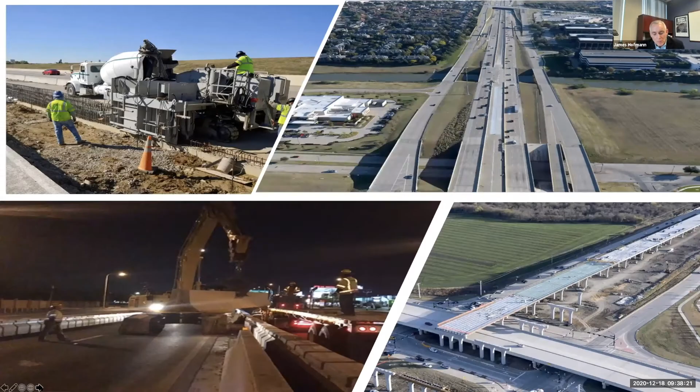So the global pandemic has negatively impacted all of us, and for NTTA, it's impacted our revenues. In April of this year, transactions were 57% below normal. They've leveled out the last few months to about 18 to 20% below normal. But we remain committed to bringing and advancing critical construction projects for the region, and you can see four of those here. So along the entire 26 miles of the Sam Rayburn, we're adding one lane in each direction.

We continue our 4th lane addition on the President George Bush Turnpike by adding that 4th lane in our last 2 sections, which spans from I-35 East to I-20.

In a much needed congestion mitigation and improvement project, we're expanding the Dallas North Tollway with the bridge over 380. And we just started construction of a 2-lane frontage road from FM 428 up to the Grayson County line.

So here in the next few years, you'll be able to take the Dallas Parkway and the Dallas North Tollway from Grayson County all the way down to downtown Dallas.

And last is a sign of our commitment to safety. We're replacing the median traffic barrier on the Dallas North Tollway from George Bush south to 635.

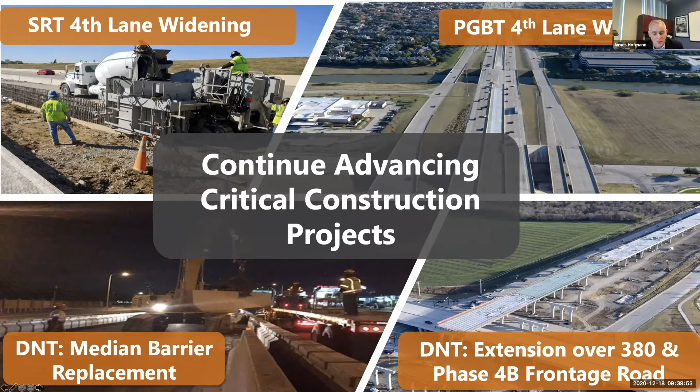These 4 projects represent an investment of over $400 million back into our region, and it's created thousands of jobs for our residents.

Finally, I'd like to talk a little bit about how to get engaged with NTTA. Those 4 projects, as well as others we're providing now and those in the pipeline, are possible because of our great vendor community here in North Texas. We need you to help us deliver the transportation options our region is asking of us.

We spend up to 300 million annually, and we want to do business with you. If you haven't already, we encourage you to register at nttamarketplace.org. There you'll be able to review and submit responses to NTTA opportunities, and also sign up for notifications for procurement opportunities that meet the specialties of your firm.

We're also very proud of our work in business diversity. Over the past several years, over 30% of our spending has been with diverse firms. Again, 30 cents out of every dollar NTTA has spent has been with a diverse firm, and we're very proud of that.

We have a number of outreach events which provide opportunities to meet and interact with NTTA staff, learn about upcoming procurements, and network with other firms. We also have robust capacity building programs internally with our ROAD program, which is relationship and opportunities advancing diversity, as well as our cooperative inclusion program with TxDOT.

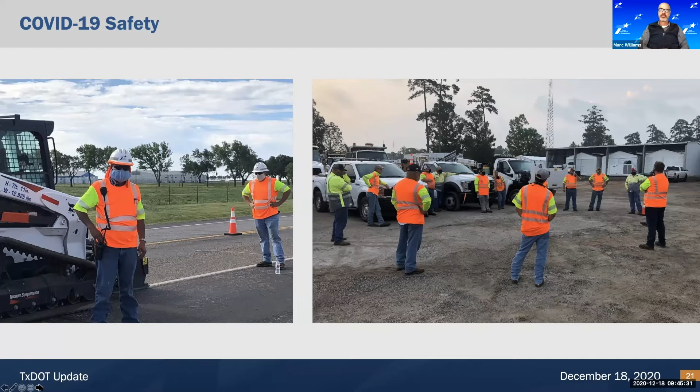So we are continuing to execute. You all, partners with us in the contracting community, are a big part of that, and thank you all very much for your commitment. So let's jump into the next couple of slides here and talk a little bit about some of our priorities and initiatives.

Clearly, TxDOT's top focus is always safety, and the commission stepped up about a year and a half ago with an additional $600 million in safety funding approved by the commission. To date, $163 million of that has been let, with the remaining funding scheduled as part of the lettings through the end of this fiscal year. It was a quick turnaround, directed to go toward new projects to be included in lettings as quickly as possible. Developing those projects and getting them ready, and being able to execute on all $600 million in really under 2 years, is a remarkable achievement.

But it's all going toward the goal of ending the streak of fatalities on our Texas roads, which has been a charge of ours. Sadly, we surpassed a 20-year milestone, 20 years of having a fatality on our roads every single day, which is just a sad and difficult challenge for us. But we're up to the challenge, and we're committed to driving down fatalities on our roadways, ending the streak, and achieving vision zero by year 2050, which is the charge from our commission.

Go to the next slide, please.

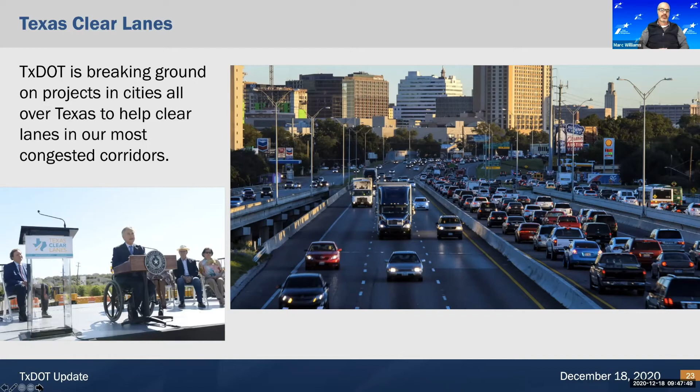Another important emphasis area continues to be our energy sector. The energy sector dipped a little bit this year during the pandemic, but the activity levels and the challenges that our motorists and operators in the energy sector face day in and day out, particularly from a safety standpoint, are critical, and this is an important sector for the Texas economy.

Through Proposition 1, which relies upon oil and gas severance taxes to help transfer those into the road fund, we received a transfer of $1 billion this year. Maintaining the productivity and competitiveness of our energy sector is really an important partnership for the state of Texas, and continuing to make these investments in that region of the state is a top priority as well for our commission. Next slide, please.

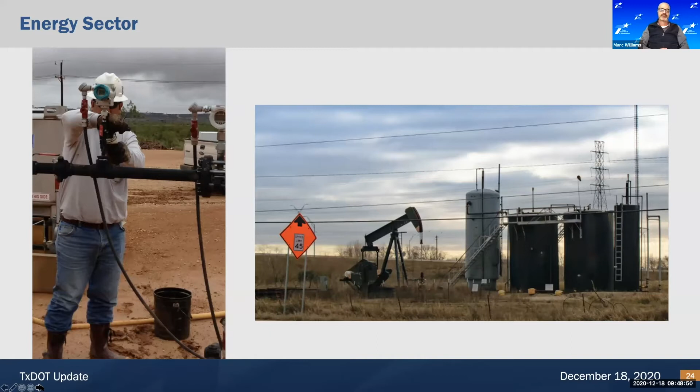So we'll talk a little bit here about contracting activities within the state of Texas. Our contract lettings continue to progress. As we talked about earlier, we're maintaining the momentum that we have in the state, and our current schedule of contract lettings really strives to maintain a balanced portfolio of lettings every month. We really shoot for a range of around $400 to $600 million a month.

At times, we've seen some dips in the last couple of months in the number of projects included in our statewide lettings, but we're expecting those to pick up over the coming months, and we expect through the end of this fiscal year there to be a pretty robust statewide letting program throughout Texas. We'll get into a few more details as we get into the next slide here.

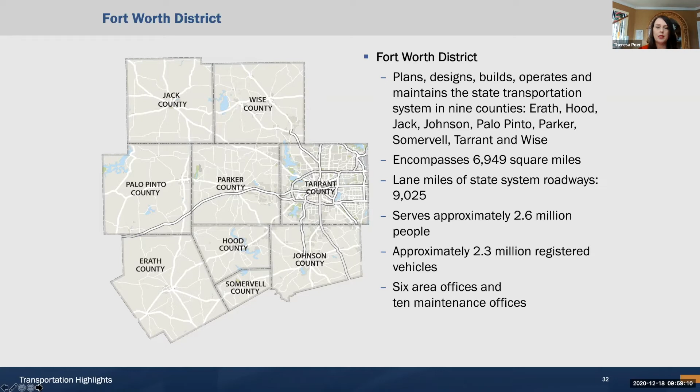Our Fort Worth district serves 9 counties in the area: Erath, Hood, Jack, Johnson, Palo Pinto, Parker, Somervell, Tarrant, and Wise County. Our total square miles are around 6,900, with a little bit over 9,000 miles of state system roadways. We serve approximately 2.6 million people, 2.3 million registered vehicles, and in our district we have 6 area offices and 10 maintenance offices.

On district statistics: this past year we had an estimated annual construction letting of around $400 million. Currently, we have $2.7 billion worth of active contracts going on, including $1.4 billion of traditional design bid build projects, and our 2 CDA projects still ongoing -- the 635 and 121 interchange, and the 35W 3C project. As of now, we have about a 51% completion rate of our total construction projects. Our average annual maintenance budget is $164 million in the district.

Now I want to change gears and talk about some different initiatives. Mr. Williams covered the Clear Lanes initiative in his presentation. In 2014 and 2015, Texas voters approved Prop 1 and Prop 7, which direct different funding streams back into the State Highway Fund. TxDOT has dedicated $6.8 billion through the Texas Clear Lanes initiative to help address congestion and gridlock in our Texas metro areas.

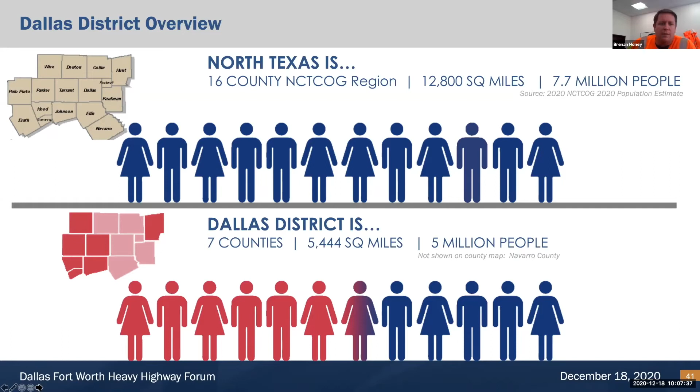Navigating through the pandemic, on March 13th TxDOT administration informed the district that office workers and non-essential employees must work from home starting March 16th. Credit to our district engineer, Mo Bur — sometime in February he started discussing plans in case the pandemic really did come. At the time I was a little reluctant to believe it because it happened so fast, but they had already implemented some plans and we were doing alternative work strategies, so we had a lot of equipment ready for our office personnel to go home. It was pretty seamless when the order came down on March 13th.

Then Sunday night, March 15th, Dallas County issued one of the first stay-at-home orders in the state, which caused a lot of confusion. We poured through the order to determine if it applied to TxDOT. We didn't think so because it was a county order and we're part of the state. We coordinated with TxDOT administration and the Attorney General's office for further clarification, and subsequently determined yes, we are essential. We're going to keep moving, keep working, making sure the highways are safe.

At the same time, we started thinking about additional protocols for construction and maintenance contracts. We had to figure out how to limit the number of employees in the field office, get hand washing stations, and work with the TxDOT-AGC Joint Task Force for additional safety protocols. But the main thing was we kept working. So on March 16th, our construction inspectors and maintenance workers showed up to work, and we started doing our daily safety briefs outside.

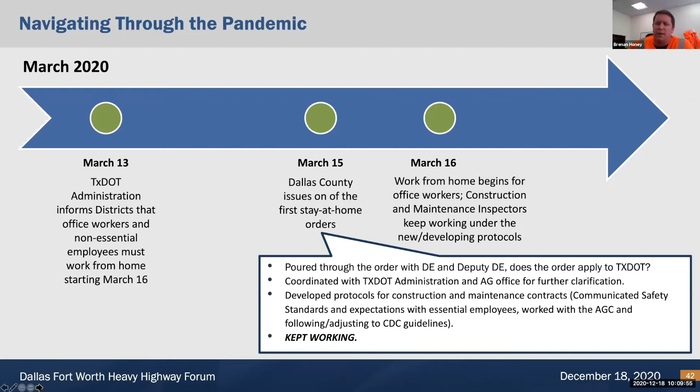As far as the office, TxDOT released a playbook for safely returning to in-office operations. It's a 3-phase approach for the return, and we're currently in phase 1B.

Phase 1B is up to 25% occupancy. It's totally voluntary, and our office is probably running a little below that 25%, but all meetings must be virtual as much as feasible. In the field, we'll often meet in the field, but in-person meetings are only allowed in an actual district office or TxDOT-owned property, and we have to have the chief engineer's approval. How long we'll be in phase 1B is unknown given the pandemic, but it seems to be working pretty well for our district. We've really kept moving, and I've been extremely proud of everybody I've been working with, from the administration down to the guys working every day on the maintenance crews.

All right, let's get to something a little more positive. I wanted to talk about some project highlights. I know through a lot of these conferences we've talked a lot about this ABC project, but we're real proud of how this went.

This was 635 northbound and southbound at Seagoville Road. SEMA Construction was our contractor, and we had a strong partnership with them. I was the area engineer when we were planning this, and then Amanda Moser took over when it was actually constructed.

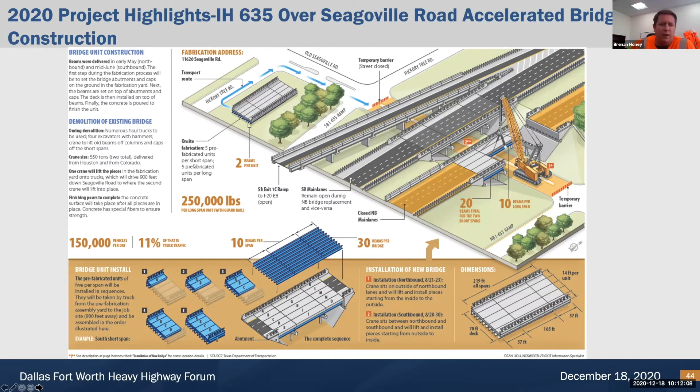You can see in these pictures they built the pieces offsite and brought them in on trucks. The larger pieces weighed about 250,000 pounds, and they essentially already had the bents and abutments retrofitted. Then all they had to do was take off the old deck and start putting in the pieces. Each span had 5 pieces, so each bridge had 15 total pieces.

The closures took 56 hours - that's what we gave them, from 9 p.m. Friday to 5 a.m. Monday morning. Northbound, the first time they did it, they finished 2 hours early, which was great. Then when they did southbound, they actually finished 6 hours early because they had a learning curve.

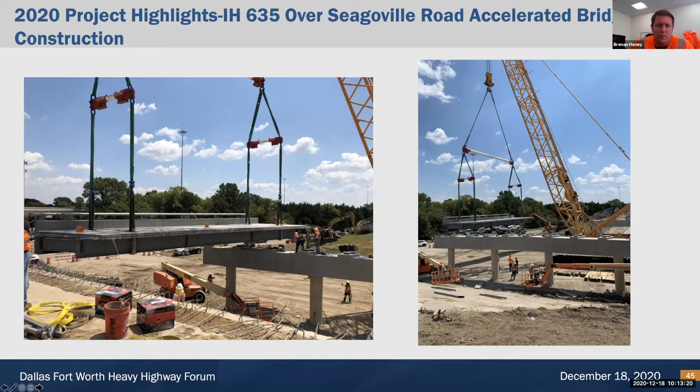Overall the contract was $9.2 million. That's not huge, but what it accomplished - replacing 2 bridges on an extremely busy interstate highway - we're really proud of it. This is our first ABC project, and we're going to look for other opportunities to do more jobs like this to minimize disruption to the traveling public.

You can see the yard with the steel beams, then they blocked it up, formed it, and poured it. Then they brought them in and set each of the panels in place. You can see they have loop bars that overlap each other from each piece on the right, and then they did HES, high early strength concrete, through those joints to lock all the pieces into place.

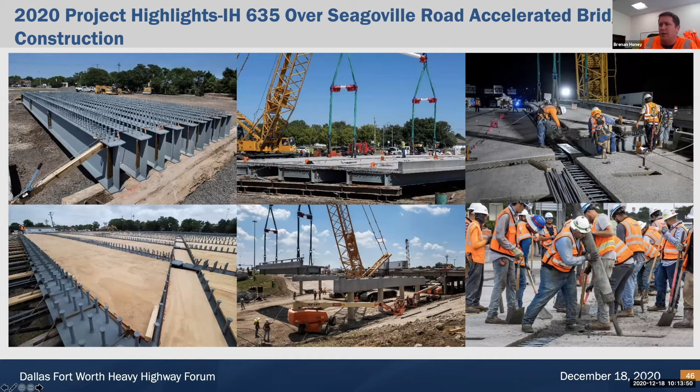And then if you go to the next slide - all right, this is the I-20, I-45 redecking. Gibson Associates was the contractor. It's about an $8 million contract.

You can see on the left how bad those existing direct connects were. A lot of these older steel span direct connects especially have a lot of issues on the surface. So they did ground penetrating radar and developed a plan - we would hydro demo the first 2 inches or so, down to the rebar on the concrete spans, and on the steel spans we'd do a full deck replacement.

Each DC was set with strong incentives and disincentives, ranging from $10,000 a day to $40,000 a day. I do want to point out Gibson met every milestone or was early. That's from exceptional planning on their part, getting as much done as they need before they actually close the direct connect, and then when it closes, they go in and do it.

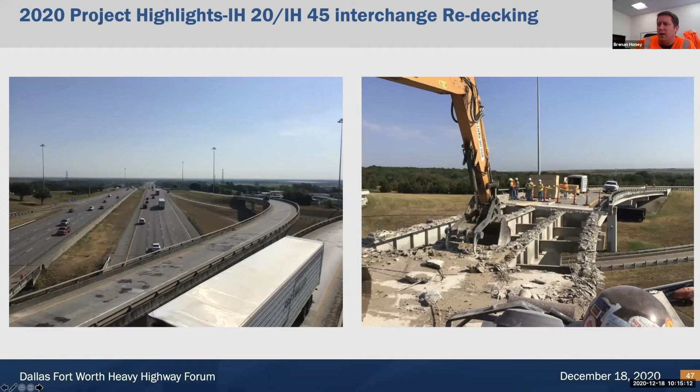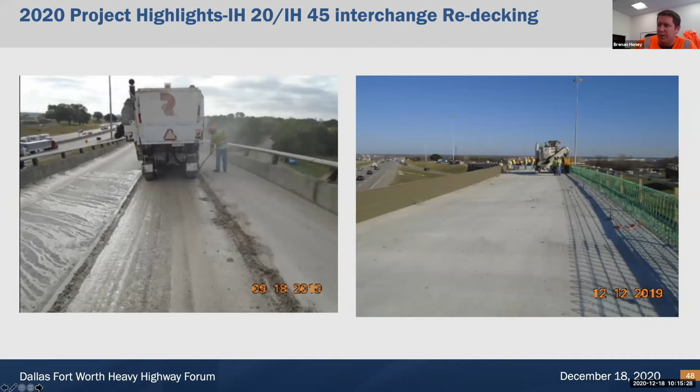Overall this job won the TxDOT 2020 Journey to Excellence Award Gold. I can't emphasize what a huge improvement it was. On the left is the hydro demo, and on the right you can see what the new deck looks like right at the end. They still had to pour the rail on the right, but it's just a 1,000% improvement. It's quite amazing.

All right, let's take a quick look at our construction that we got going on - this is kind of a high level view. We currently have 125 active design bid build contracts under construction with a contract value of about 2.2 billion, and approximately 1 billion outstanding left to go. We currently have 2 design build projects under construction with a total contract value of 2.4 billion, with approximately 2 billion outstanding.

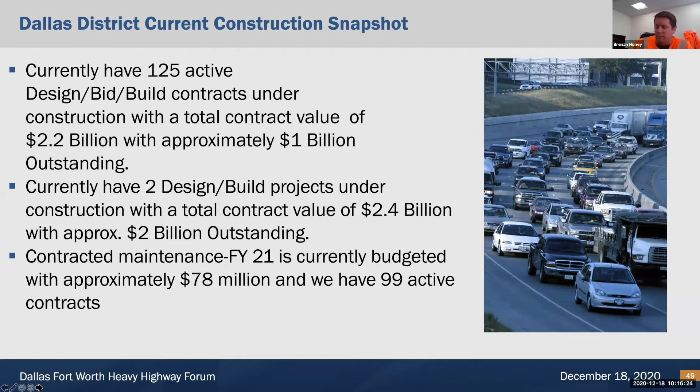I also want to point out our contracted maintenance for fiscal year 21 is currently budgeted at approximately 78 million, encompassing about 99 active contracts, and those are rolling contracts. So there's always opportunities every month, and that's fiscally constrained, but we're always looking to get extra money. Hopefully by the end of the FY we're in the $82 million contracted maintenance range.

All right, this was just a brief overview of those other numbers by area office. So Amanda Moser, she's the Dallas area engineer. She's got about 687 million under construction right now.

Brandy Bush, our signal construction is at 28.8 million. Brenan Honey, which is me, that's the diamond interchange. We're running it out of the construction office. That's sitting at 326 million, with all the force accounts, et cetera. And then David Morin, that's our seal coat, at 14 million.

Jennifer Vorster with Collin County is at 261 million. And John Husbeth, that's the other seal coat, that's at 13 million. That's this year's; the other one was from the year before. And then Juan Paredes in Ellis and Navarro is sitting at 521 million.

And then Lane Selman, area engineer in Kaufman Rockwall, he's got 187 million right now, and that's about to change dramatically in the upcoming months, and we'll get into that in the breakout session. And then Tina Massey, as well, in Denton County, has 174 million. So like I said, we'll get into some more details in the next session on some of these upcoming jobs and the ongoing jobs, because Dallas is going to stay busy.

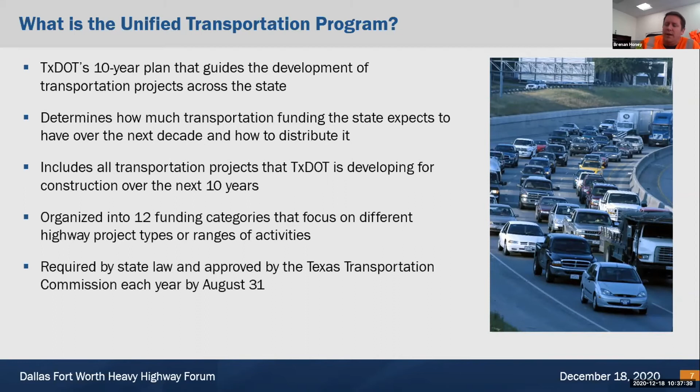It's organized into 12 funding categories that focus on different highway project types or range of activities. So you always hear people saying Cat 6, Cat 1, Cat 8 - those are the UTP funding programs, funding categories. It's required by state law and approved by the Texas Transportation Commission each year by August 31st, and it may be updated more frequently if necessary to authorize major changes to one or more funding allocations or project listings.

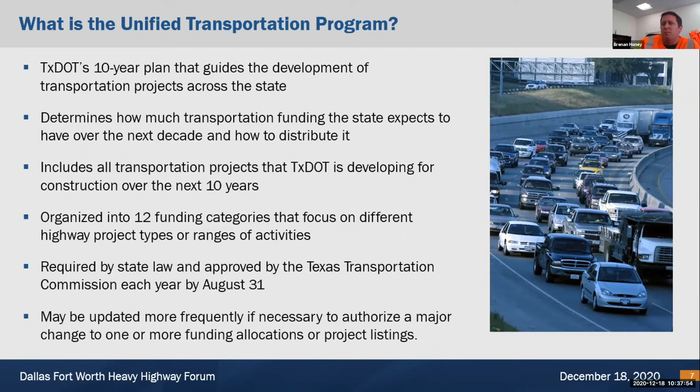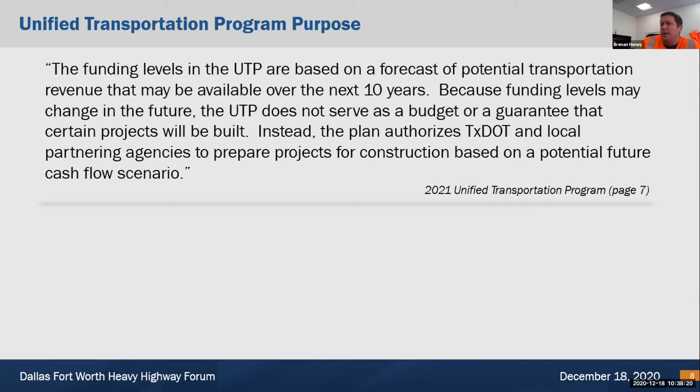The funding levels in the UTP are based on a forecast of potential transportation revenue that may be available over the next 10 years. Because funding levels may change in the future, which we expect them to, the UTP does not serve as a budget or a guarantee that certain projects will be built. Instead, the plan authorizes TxDOT and local partnering agencies to prepare projects for construction based on a potential future cash flow scenario.

Teresita from our programming office put this slide together for Mo, and I find it pretty fascinating. It's a continuous cycle. We're in FY 2021 right now, and we're coming up on the 87th legislative session in January. You can see the activities that are going to be going on as they develop, and then we get our General Appropriations Act most likely in June, which sets the TxDOT budget. Then they start doing statewide public involvement, and that will set essentially the 2022 UTP cycle - it will update from the 2021 cycle.

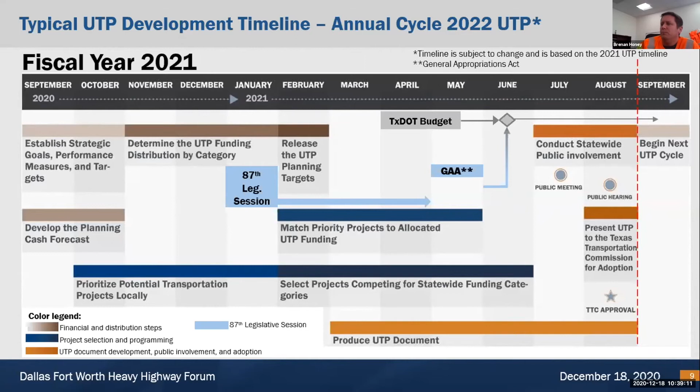All right, so this is the 2021 UTP distribution strategy. This is the statewide, and you can see there's 12 funding categories with how much is allocated for each one, and that's for the 10-year forecast. The total UTP was around 74.6 billion.

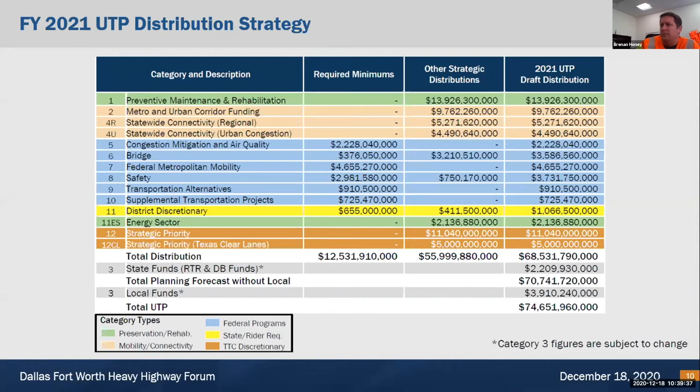You got the clear lanes, you got everything else. You got the safety, which we're not exactly sure, we go after every penny we can. We try to couple that with our Cat 1 as well to try to get these 3-foot shoulders. We still have a lot of rural areas and we're still trying to get away from these 22-foot roads and get them out to 28, 30 feet. We try to utilize safety money to get that.

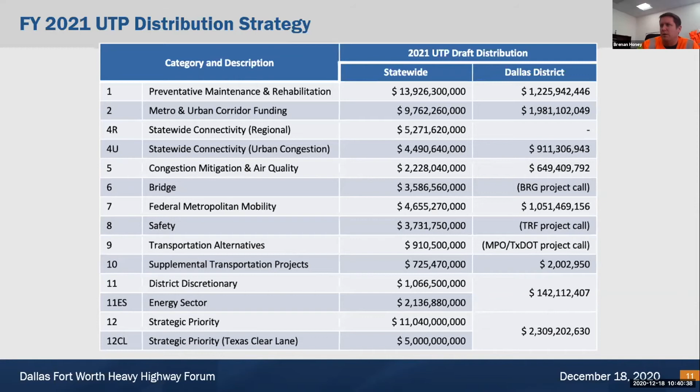So we're always looking for not just intersection safety, which we do. We run all kinds of numbers trying to generate scores from what's happening in the field to get that safety funding and couple it with some of our Cat 1. You can see you kind of divide that out by 10 and that gives you what you think we're going to have on average per year. So if you go to the next slide, please.

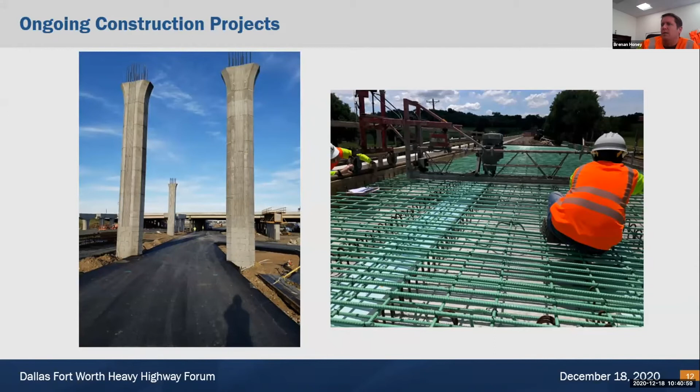All right, let's talk about some of the ongoing construction projects on 35E Lower Stemmons. It's $71.5 million, it's Balfour Beatty. We're hoping to finish it up this summer. It's operational improvements consisting of collector distributor roads to eliminate high volume weaving. No new right of way was required for this job.

We've still got to finish the northbound and southbound collector distributor bridges. And we got to finish up and mill and inlay the 35 main lanes. All right, next slide, please.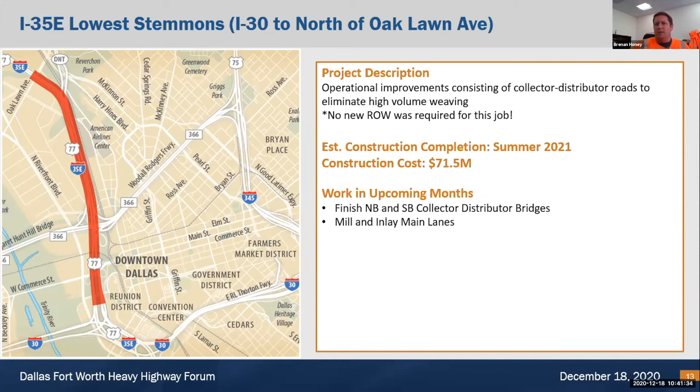I know over the years a lot of people have probably seen the simulations on what, we only leveraged 70-something million dollars, but the amount of operational improvement that we're going to receive out of that job is phenomenal. That's a testament to our engineers and our consultant engineers that analyzed this and figured out a way to do this.

You can see we're going to see a 178% increase Oak Lawn to Woodall, and 54% increase from southbound I-35E, and then Woodall to Oak Lawn, 285% increase, and northbound 35E, 33% increase. All right, next slide, please.

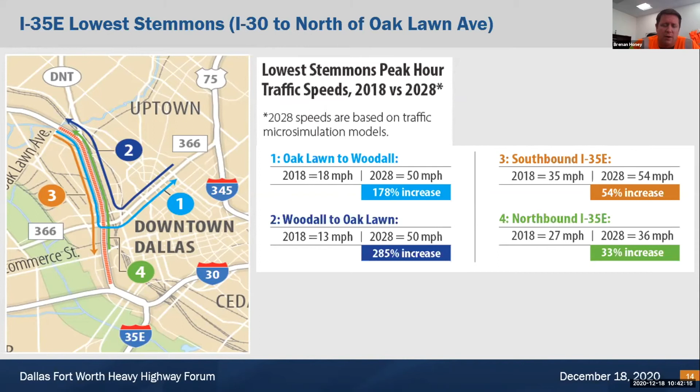All right, so this is the Southern Gateway, the design build. Right now it's reconstruct from 8 to 10 lanes and add a non-toll reversible main lane. Estimated completion is going to be the summer of 2022, and the construction cost is $625.6 million.

Current work and upcoming work is concrete paving, retaining wall, bridge work continues along 35E, including work on cross-street bridges for Ewing, Marsalis, and Illinois. Bridge widening and concrete pavement work on US 67, and traffic switches completed recently, and upcoming traffic switches will continue to open new lanes and ramps within the project limits.

And if I'm not mistaken, I think we're about 2/3 on the money. I think we're a little over $400 million spent. So there's, you know, 230 million left to go. Next slide, please.

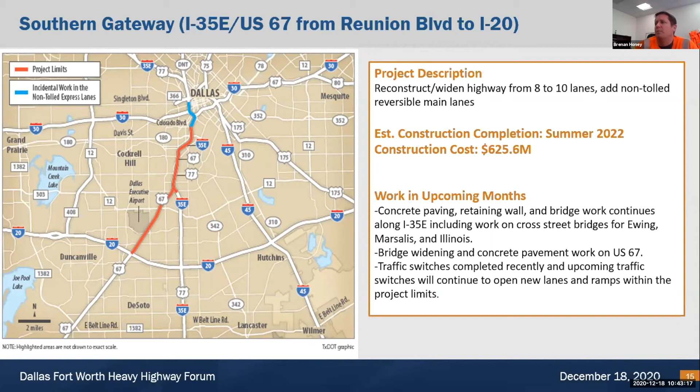All right, so here's our biggest design build. It's just getting really ramped up. This is 635 LBJ East. It's taken a long time to get to this point, and we're really excited in the district to see it going. I get to drive it every day coming through the interchange at 30 and 635, and it's pretty cool to see it going up.

It's widened highway from 8 to 10 lanes, add continuous frontage roads, reconstruct grandfathered toll managed lanes. Hoping to complete it in 2024, and it's approximately $1.6 billion.

Upcoming work is continue to relocate utilities through the corridor, excavation, drainage, bridge substructure in various locations. Continued progress on Galloway Bridge over IH-30 and temporary Skillman Bridge over 635, and then also the IH-30 interchange. Temporary traffic switches along the main lanes, frontage roads, and cross streets. Next slide, please.

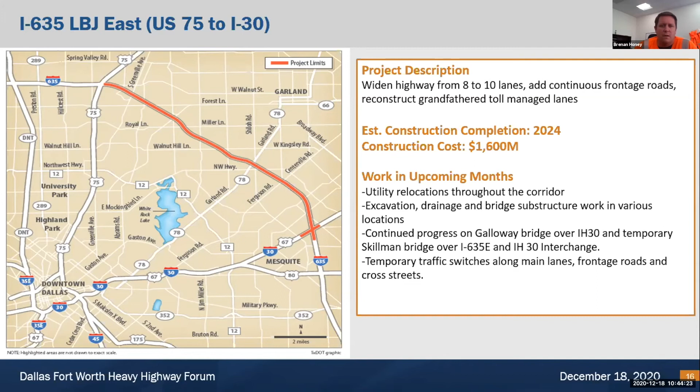So there you go. The Irving interchange, this is phase 2 of the Diamond.

It let last May, and we're just really ramping up on it. This job's being run out of my office as well because the Dallas area office is so busy at the time. It's reconstructing the interchanges at 183, 114, Loop 12, and 482. It's $301 million, and the work going on is essentially structure work, drill shafts everywhere. They're really getting access to a lot of places, getting after it, especially right there in the box interchange at 183 and Loop 12, and along 482 at 114. They're also doing a lot of ITS work, and the City of Irving water and sanitary sewer work is going on as well.

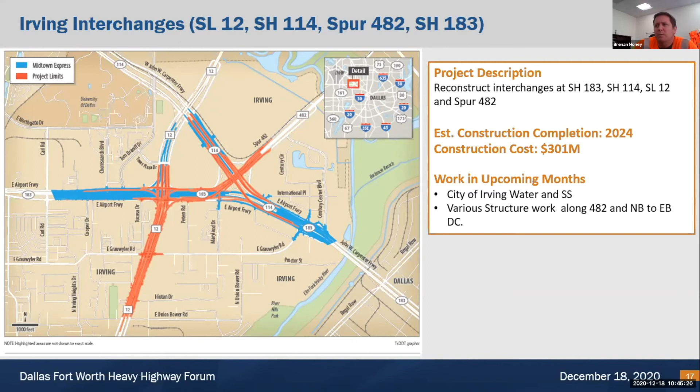All right, next slide. This is upcoming projects, for the remaining FY21. We've got about $439 million left to go this year.

I want to point out the next big one is obviously going to be the IH-30, and I'll get into a little more detail on that one. It's sitting at about 157, 158 million.

And then there's this smaller one, reconfigure intersection with sidewalk improvements at SH-78. That's the 3G project. That was kind of a polarizing project, very political. It's been very tough, a very tight area with tons of traffic. We're reconfiguring the intersection, so even though it's only 5 million, we always like to point that out. It's going to be a tough job, and when it's done, it's going to be really nice. It's a great opportunity, but not going to be an easy job.

Pointing out a few of the other jobs, we've got the US 380 second job that will go, and I'll get into more detail on that one. It's sitting at about 140 million. There are some other various ones there we can talk about, but let's go to the next slide.

For FY22, some of the highlights: we're expecting about $498 million right now. Depending on the timing, that might also include the procurement of the 35E. We're hoping to have that procured this summer.

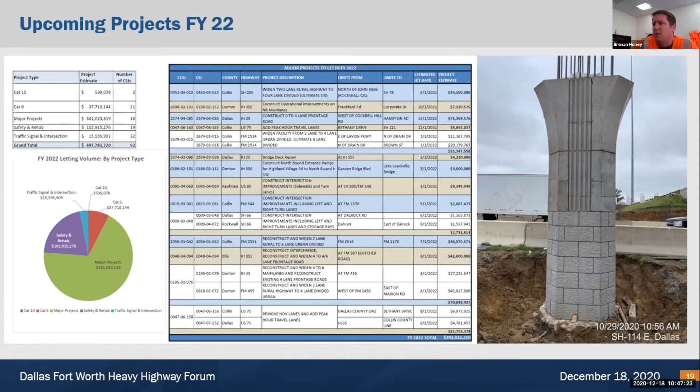If you go to the next slide, let's take a quick look at the I-30 projects. The construction costs are divided into 3 projects. The first one, in green, is going to let in March of 2021, sitting at about $158 million on the estimate.

It's going to get frontage roads across the first part of the lake from Dalrock to Bass Pro. Then the next section, from Dalrock to 205, we're hoping to let in FY23. That one's sitting at $243 million.

And then the last one, from 205 to the Hunt County line, again in FY23, hopefully early in 23, which would probably be September, October of 2022. It widens 4 to 6 lanes, at $289 million. The goal, if you've ever driven that, it's extremely congested with no alternate route. We've got to get these frontage roads punched through across the lake and then get more capacity through Rockwall County.

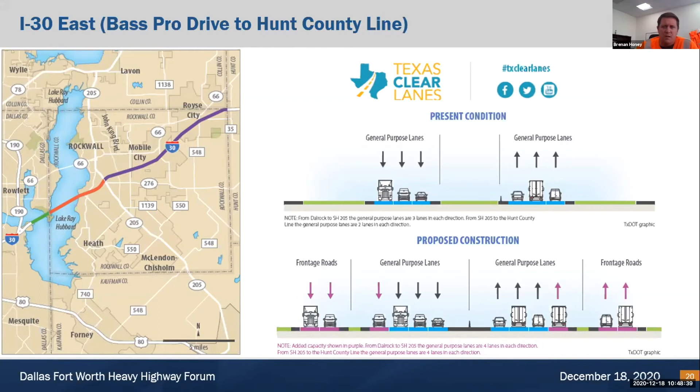Next slide, please. I briefly touched on this a couple minutes ago: US 380 in Denton County. It lets in May 2021, and it's approximately $140 million, from Loop 288 to the west.

The one that's going to let from 377 to west of County Road 26 is going to widen from 4 to 6 lanes, divided urban, with grade separation. I built that job in Collin County -- it's kind of a super arterial section, not quite a freeway, but it also has some controlled access elements, and essentially it's going to tie onto that piece. Mario Sinacola built that in 2017, 2018.

So that's that piece. And then the piece you see in red is already let -- I believe Regal Construction got that one, and it was about $21 million.

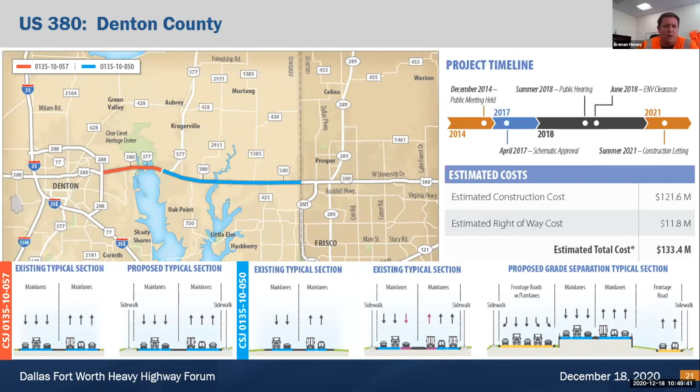All right, next slide, 35E phase 2. We're literally having one-on-ones right now for this job, in the middle of procurement. The construction cost estimates are between 650 to 709 million.

It fully reconstructs and widens I-35E from 635 in Dallas County to the Denton County line. General purpose lanes will be widened from 6 to 8 lanes, and it will include construction of continuous frontage roads and numerous intersection improvements. Procurement, like I said, is ongoing.

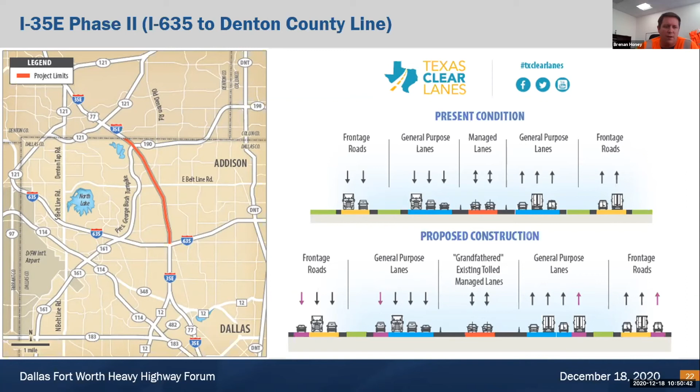The draft RFP was released and shortlisted proposers in August. TxDOT released the final RFP in October, and we're currently working through the ATCs. We expect to have it under construction this summer with an estimated completion date in 2025. Like another speaker said, find out who's shortlisted on that and be in touch with them. There is a lot of opportunity on that job as well.

Now here's the 35 Denton County. I think it shows on here 10 different jobs. There's actually another job that's going to let before that, about a $14 million job. But based on the funding, we're seeing what's happening. The total construction cost of this whole corridor is about $1.3 billion, with intersection and road improvements intended to address traffic bottlenecks caused by rapid population and industry growth along the 35E and 35 corridors in Denton.

Estimated completion, if we can get it all funded, which is still not entirely certain for the whole corridor, would be somewhere around 2028. But I do want to point out a few of the projects we're pretty confident we're going with. Project 8 at FM 455 has an estimated let date of 8/22. It includes widening of 455, primarily with a structure at 35E, I think it's an underpass, at a cost of $70 million.

Project 9 is partially funded, totaling over $400 million. That's the big red line on there. It's most likely going to be broken into smaller pieces to try to utilize the funding we do have, and we expect some of that to start in FY23.

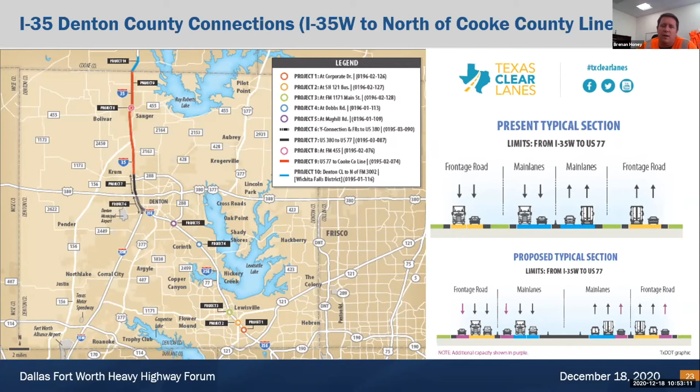So that's a snapshot of some of the construction. Of course, we've got dozens to hundreds of other jobs and projects in the works, and we're going to continue trying to get those ready, so when funding becomes available, if there's some kind of stimulus package or whatever comes along, we can get those funded, work with COG, and get those out the door. So that's all I've got for now. If you have any questions, feel free to contact the Dallas district or me anytime.

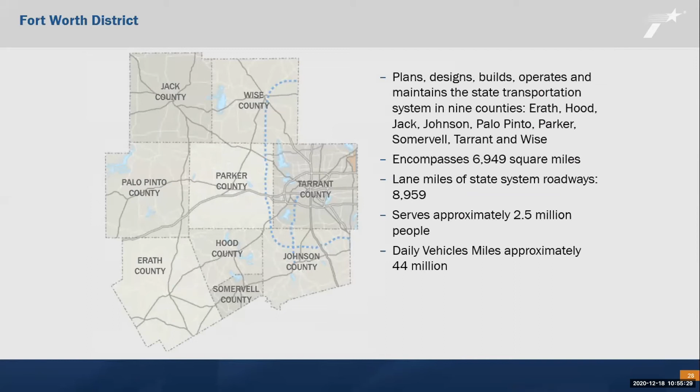So just thought I'd cover a few contracts, projects that are under construction but still have some significant work left, where there may be some opportunities.

Our 30/360 interchange near Six Flags is still ongoing. We estimate about another 2 years worth of work on that interchange. We did drop some bridges across I-30 that really opened up some space, so we ought to see some real rapid progress continuing on that project.

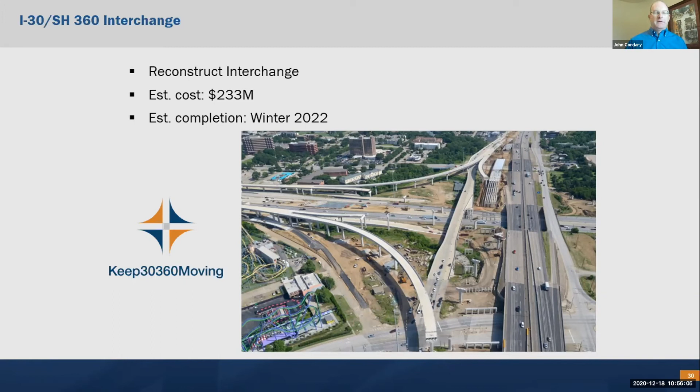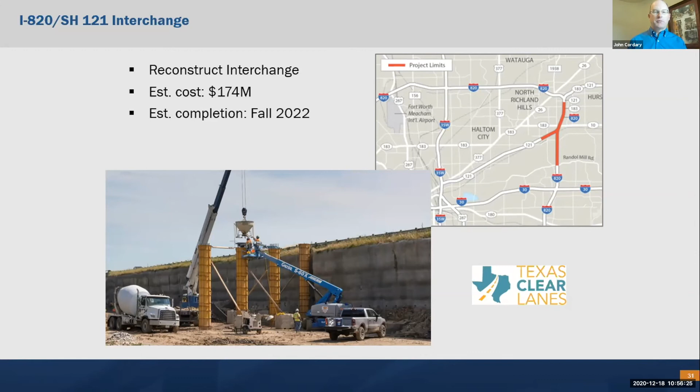One of our Texas Clear Lanes projects is the I-820 SH-121 interchange. It's about a $174 million project that we estimate completion in the fall of 22. There still may be some opportunities for work on that project.

As mentioned earlier, our North Tarrant Express was broken up into 3 projects. 3A and 3B have been completed, but 3C has just recently started. It's a $600 million project to reconstruct Interstate I-35W from 287 up to Eagle Parkway. We estimate completion there in about 2024.

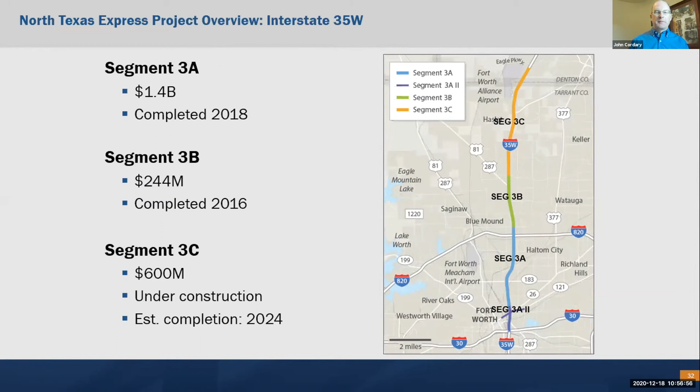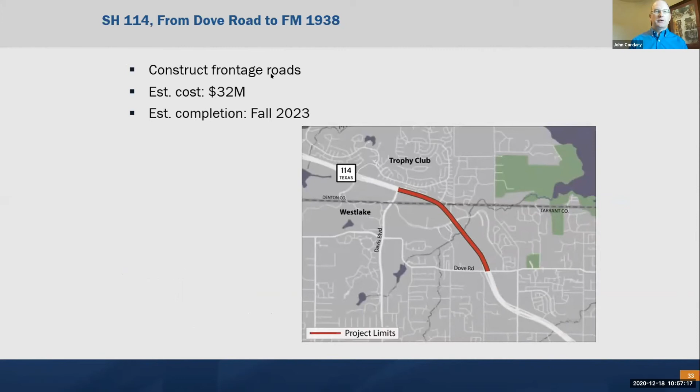Moving over to the Southlake area, we have a little section on 114 that has a gap in the frontage road system. This project has let but should be starting here over the next few months. It's about a $32 million project to construct frontage roads in this section of 114.

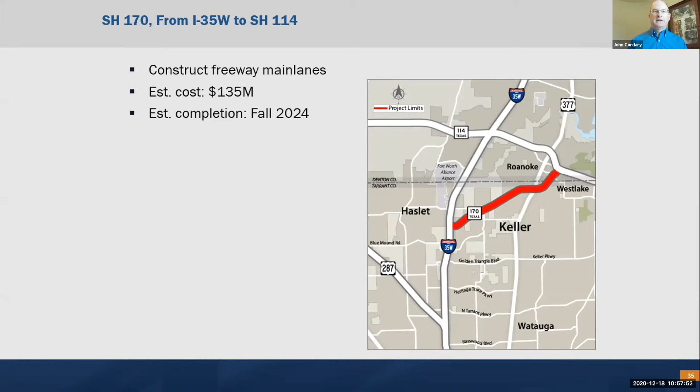For FY21, we were projecting just a little under $300 million. Through the first 4 months of FY21, we're on track, continuing with our project development process, and we still feel confident that we're going to meet about a $300 million letting volume in FY21.

So digging in a little deeper into the 21 upcoming projects.

Coming up in January, 2 projects out in Parker County: a bridge maintenance project for just under $2 million, and in Johnson County, a small safety project to do some rumble strip installation and pavement markings.

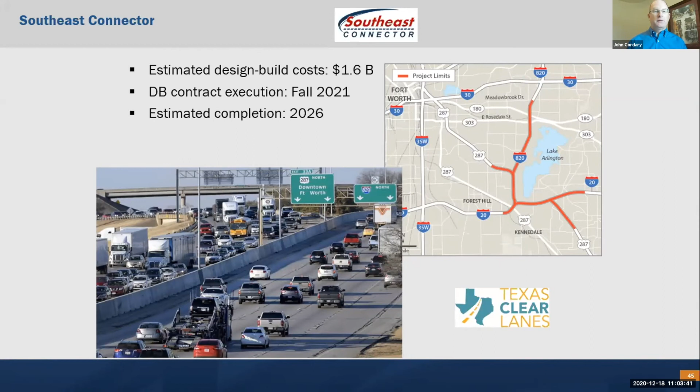And then back over near the 360 interchange, we've got a little gap there on 360 to reconstruct that freeway. We estimate about $55 million with the letting date there in about mid-2022.

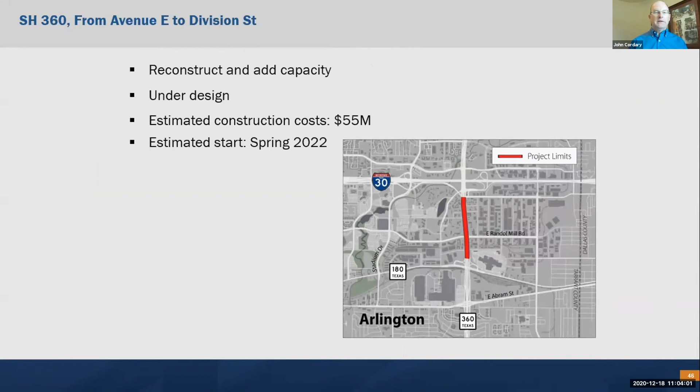And then last, out on the west side of town, on Interstate 30, we'll do a reconstruction of that section of 30. We need to add some general purpose lanes and also add some of the frontage road system. It's an estimated cost of about $120 million, and we hope to get that to letting there in about late '22.

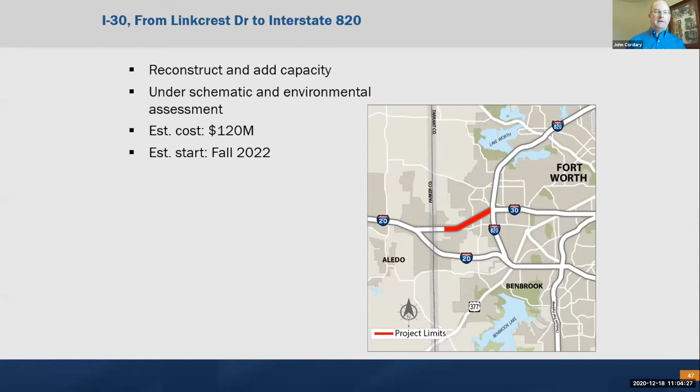So with that, that's our plan there in Fort Worth. Again, we appreciate everybody and wish everybody a safe and happy holidays.

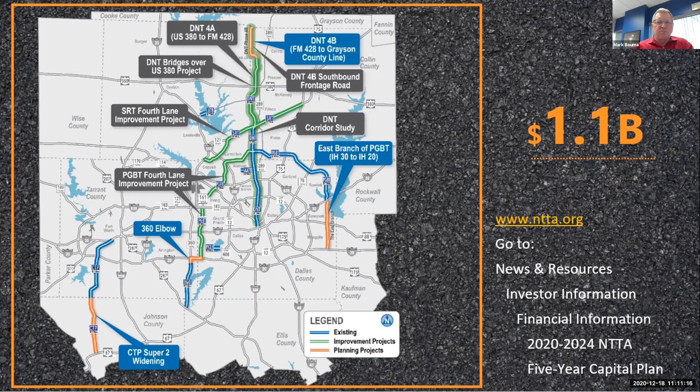So if you go to the next slide, we have been able to keep some work underway. We started design this year for widening the Dallas North Tollway through Frisco, Sam Rayburn to US 380. That design is in its early phases right now.

So this is going to be about a $100 million project that right now we're on schedule for this to let late second or probably mid third quarter of 2022. And as we get a little bit closer, we'll look to see how we can dovetail with TxDOT's letting programs so that everybody has opportunity to have a fair look at these projects.

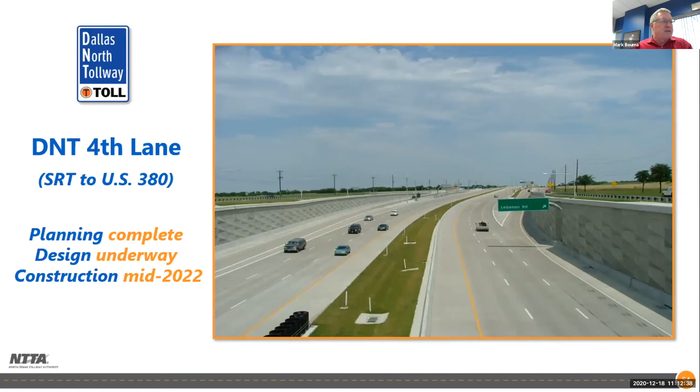So there's going to be some, this is going to be the next big project. It's about $100 million. So next slide, please. Our real effort this next year is going to be on our routine maintenance projects.

We're not having any large capital projects, but we're continuing to look at the safety of our system and making sure we keep everything in good condition, because if we let the maintenance and rehabilitation start to slide, it's just going to take that much more effort to catch up. So this has always been a very high priority for the organization to continue putting projects out.

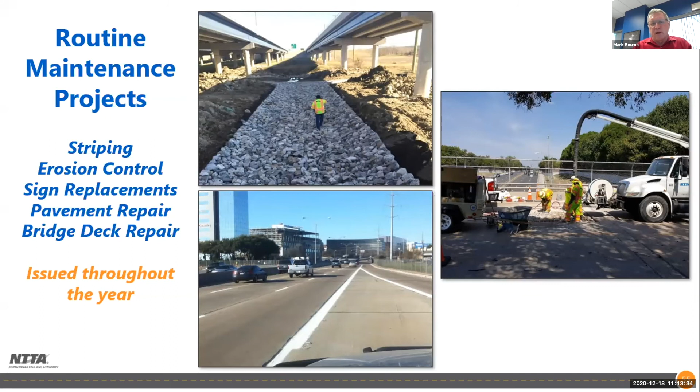For those of y'all registered in the NTTA marketplace system, you would have gotten a bunch of project notifications this morning. We actually had 7 projects hit the street this morning that were advertised. Next slide, please, I'll talk a little further about those. Advertised just this morning, 7 projects.

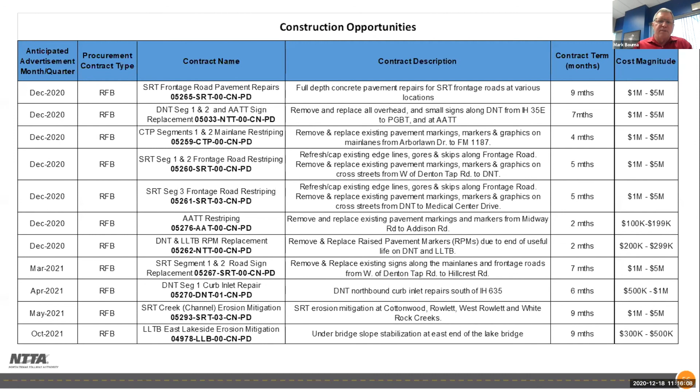Next slide, please. I'd be happy to answer any questions now or in the future, please reach out to me. And since I now lead both our construction group as well as all our maintenance engineering, I've gotten pretty well versed in all these projects and am happy to answer questions.

Thank you, Mark, I appreciate it. And now we have enough time, you guys did it, woo-hoo. There's plenty of time for us to ask any questions. There's none in the chat, but if you do have any questions for our panelists, I know it was a lot. I'm not going to lie, that felt like baptism by a fire hydrant. There were so many opportunities and so much time. But if there are any questions for Mark, John, or Brennan, please put them in the chat. Oh, there's a question, woo-woo.

Can you tell us who the shortlisted teams are for the Southeast Connector? I think this goes to John. Yes, so there are 3 teams shortlisted: the Ferrovial team, the Fluor Balfour Beatty team, and another team with Austin Kiewit. Did that answer your question, Jody? But yes, there are 3 teams.